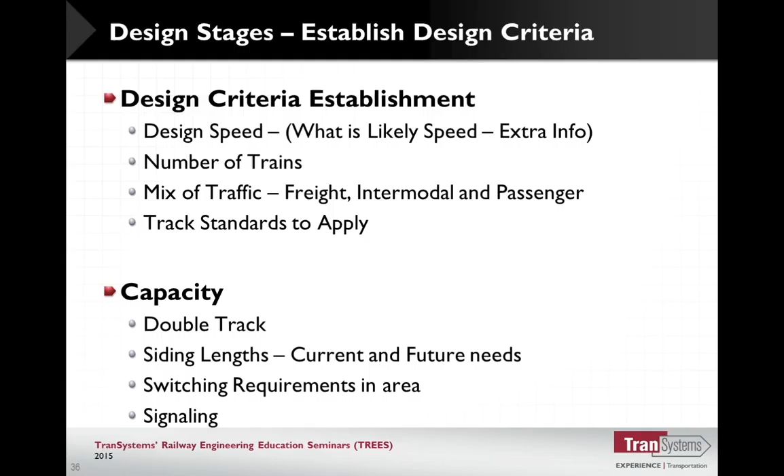Where we left off last week was talking about the main line. We've got a lot of the different issues itemized, some of the data we're going to collect, and we're going to talk about it a little bit -- how do we present some of the things to get to some of the decisions made? So we want to take it a little bit further this week regarding the main lines. How are we going to do our design? What are the things we're going to want to talk to the railroads about, and try to do it the best way?

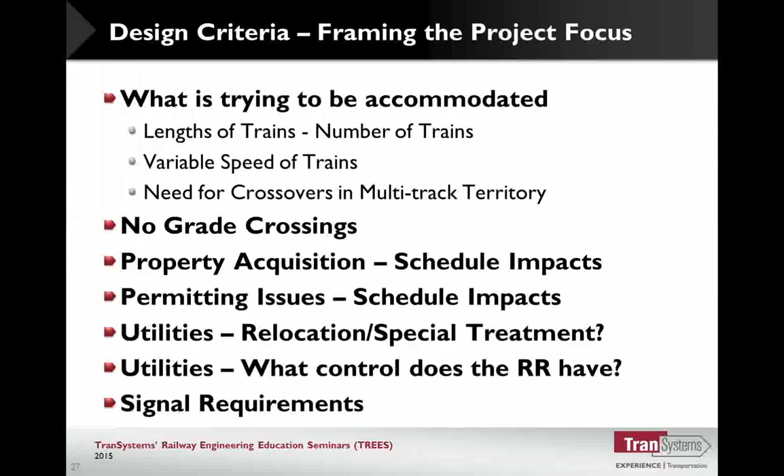The way I've been trying to push our guys is to look at and ask them intelligent questions, understanding the business, so you're not asking -- I kind of cringe sometimes, and so do the owners. A lot of times they're very polite, but I don't want to discourage questions -- just ask questions in ways that sound like you've done your homework. So do your homework, don't just be lazy and wait for the owner to give you all the answers, or let the project manager be the only guy who's going to provide you with the information. Be a little aggressive: okay, we want to do this or that, and ask the question, could we do it this way or that way? We kind of look at this one, but what do you prefer?

So when we come up with these things, I want everybody to be thinking in those terms. A lot of times there isn't a hard and fast answer on every project -- all projects aren't the same. A lot of times on intermodals people imply to me that one intermodal is the same as the other one, and it really isn't.

Everyone's got their own, a lot of the stuff is similar on the main line. I just, it's the main line, you're going to run 70 miles an hour on it, and it's all the same.

Well, that really isn't true, and we'll show some of the things you have to consider. Asking the right questions, and doing it in such a way that doesn't make it sound like you're unknowledgeable, versus asking a question that sounds like this guy's knowledgeable and he's just trying to help by getting the answer. I think we want to always try to be in that latter camp, because even as polite as the owners are, a lot of times they'll answer and think, 'I'm not sure this guy really knows what we're doing, or he seems to be asking too many questions.'

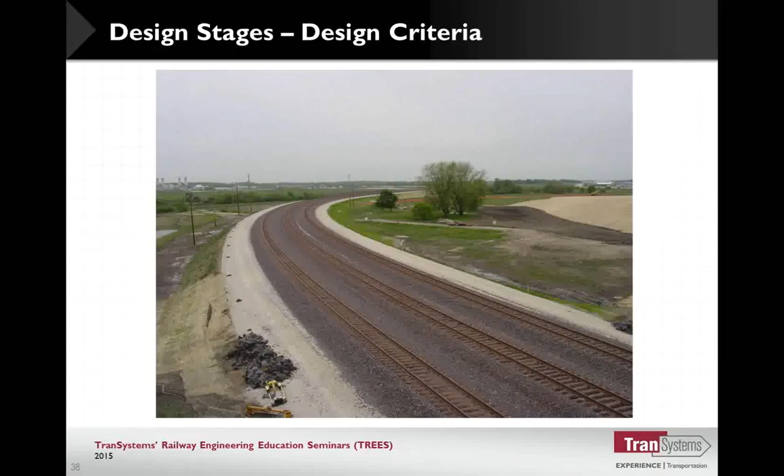That's establishing the overall design criteria, not worrying about that one simple task or specific task you have, but looking at the overall project.

Again, just kind of following up, on capacity projects we may want no grade crossings in this area, or what impacts the grade crossings may have, and what property acquisition is needed. A lot of times it would be a better alignment if you could buy a whole bunch of property, but depending on the situation it might take months or years to buy the property, or you might have to go into condemnation. All those things impact what you design, because the schedule for the property acquisition might be the ruling factor.

Or a permit issue - how does that impact the schedules? A lot of times it's very difficult on the railroad to avoid wetlands, because you just can't turn that fast. On roads or a building, you just put that on a different side parcel of the property and avoid the wetlands. But with a railroad, because it's limited on its curvature and ability to meander, you pretty much have to go through there.

So then you pick the area that's going to have the least impact. If you can get a nationwide permit, that's way better than doing an individual permit, which might take years. A nationwide permit could take weeks, or three months at the most.

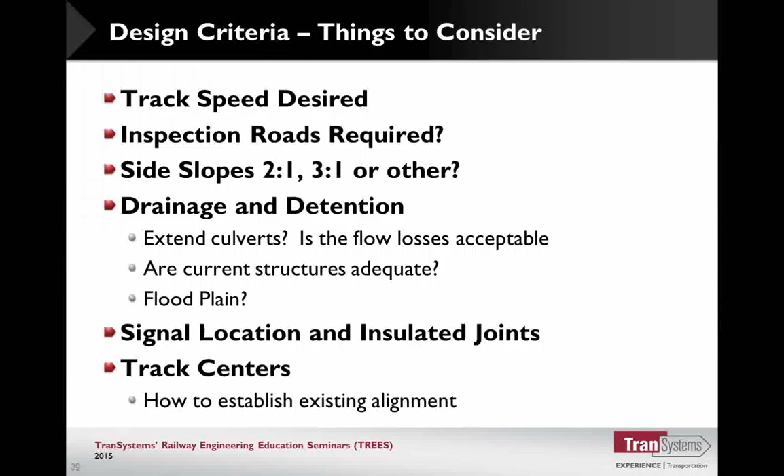We're going to take a look at a few design issues, trying to come up with whether we need access roads, for instance, and how we're going to get through an area. Here's an example—this happens to be a major lead, a 50-mile-an-hour lead into an intermodal terminal.

Some things to consider: what is the track speed? I think we've talked about this a lot, but one of the things you want is a full understanding, because at some point, to meet the schedule and what the railroad is asking, sometimes you have to bend the criteria. Sometimes it's just impossible to meet all the criteria, so you want a good understanding of what you're trying to do, so when something has to give, you know which parameter or criteria to modify.

That may not be the same in every case. There are a few criteria I consider the first ones to relax, while others are more hard and fast that you don't want to touch. You want to build up your case of what you tried, but to do that, what is the desired speed? They might say 50, but you might end up finding 30 was probably good enough.

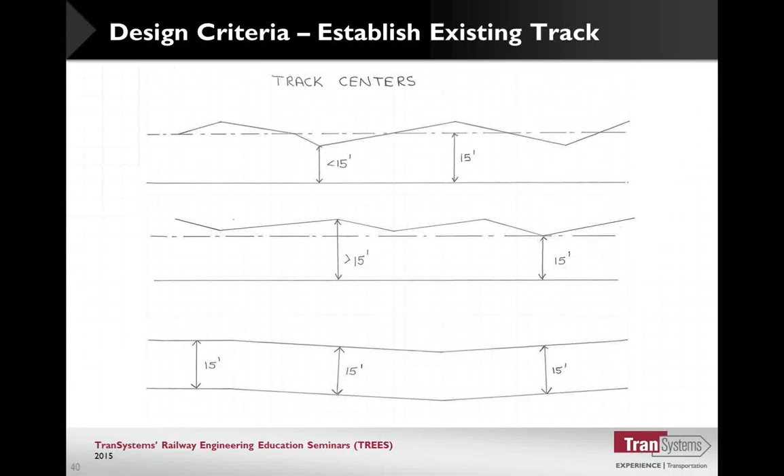If these things are inches, that's one thing. If they end up being 3 feet, you may have to evaluate it and come to one of these other solutions. But you want to do that, and that's one of the things I don't think you want to take lightly - try to understand what you're dealing with. You might have situations where for that best fit line, just like any other, you try to get that best fit - you maybe want to throw out those real bad alignment points, just so you get a little bit better best fit line.

Identifying capacity.

Out on the main line, you've got public crossings that you're dealing with, and depending on the state that you're working in, they may have different rules. Some want to have 250 - the train has to stop 250 feet from the crossing. So that's the point you're going to, regardless of where the clearance point is, the train can't go any closer than that distance to the crossing.

In Illinois, what we have is the law says 250 feet has to be clear, but the ICC, who has jurisdiction, tries to encourage the railroad to have 500 feet clear. So when they're looking at it, what is the real clearance of that siding? It's not the clearance from clearance point to clearance point, and in some cases it's not even the insulated joints of the signal on one end to the insulated joints of the signal on the other end. You have to identify where the crossings are. Where is the train actually going to stop? So what size of a train can you actually get into the siding?

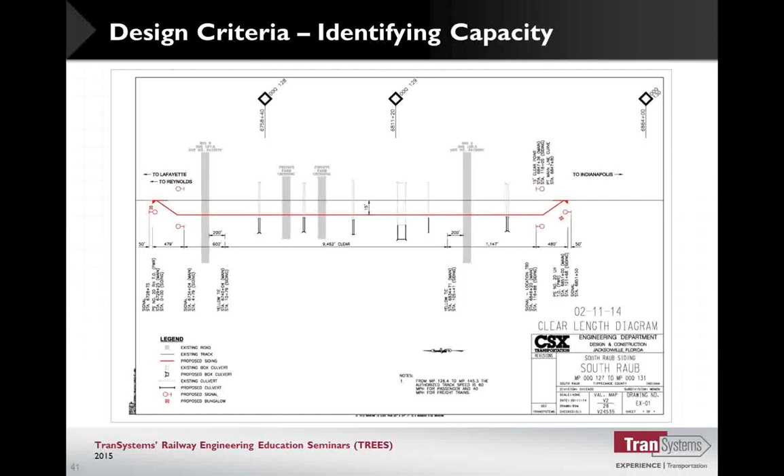So once we started coming down to it, you could do more, but you'd have to close one of these crossings to get more than 10,000 feet. But they were able to live with that clear length because of the operating conditions. So you start to balance all these things, and again, understanding what you're trying to do allowed you to make an educated determination of what you were going to recommend.

You want to identify what the capacity is required. What are the planned lengths of trains? Standard practice is we want all sidings 10,000 feet, but try to find out what they really need. Here's a standard, because a lot of times, like I mentioned, because of curves, because of crossings...

We had another one where they wanted 5,000 feet of tail room coming off an industry track. Well, if they had 4,500 it was fine. To get 5,000, they would have to build another bridge across a small creek. So, let me see, we want 5,000 but 4,500 will be fine. We don't want to build an extra bridge.

So you have to try to understand that. You go through it and provide them what they want, show them what those obstacles are, and then provide the economic justification. Maybe in the case that we had the bridge, 5,000 was the bare minimum. For whatever reason they had to have 5,000 and there wasn't any compromise, so building the $400,000 bridge wasn't really a problem.

Impacted grade crossing - can you get it relocated? Do you have to make it a grade separation? What are the options that you have? Can it be closed? Everybody's trying to close crossings except for the person that lives there. So what's the likelihood of getting that done?

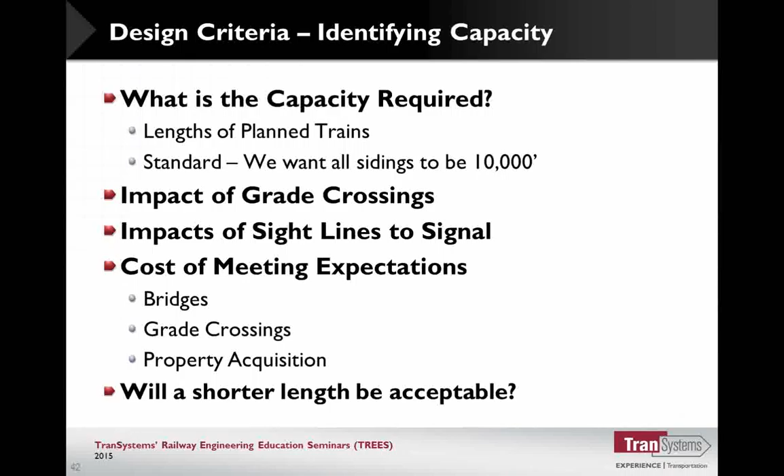What are the sight lines to the signal? You can't - it'd be nice to put it in one location, but you can't see it from there because of a curve or some other obstruction, so you can't put the signal where you wanted to have it. That might impact the cost of grade crossing, property acquisition to get what you need. All these things may lead you to the determination that a shorter length might be acceptable.

What are the security concerns? This happens to be in an urban area. We talked a little bit about that last time, but are you going to need something to secure the right-of-way? The railroads are very high on security. There's a lot of places you can drive right in. In most urban areas, they don't want the general public or rail fans or whoever doing mischief around their tracks. So try to come up with a way to secure access to the right-of-way.

How are you going to handle the off-site drainage? We're going to show some pictures here, but the normal flow of the water all came across this and went right through here and down this way across the right-of-way. It don't look that way here, but we're right in here. We ended up being about a 40-foot cut. We're about 10, 12-foot cut or a little more here.

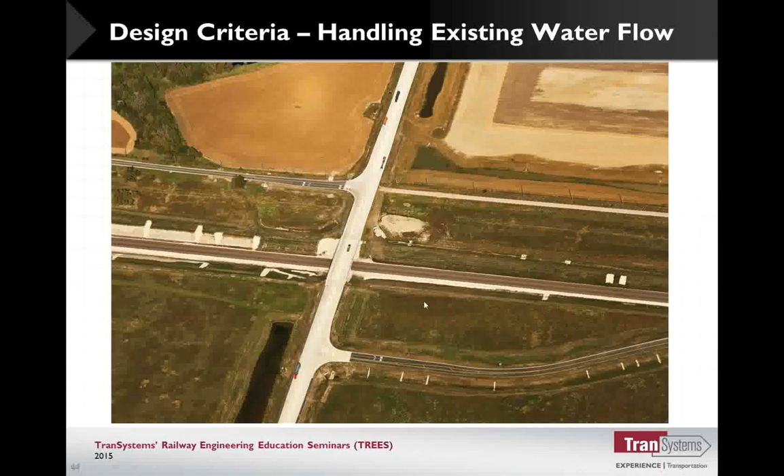That one area, just looking in the back, this area here - another one of those things where there's a lot of different ways we could have handled that water, but they weren't going to. The developer chose not to buy that, so they had to drain that water away some way. So the natural flow was this way, and it had to go down on the railroad. So they took that down and riprapped it down into their existing system.

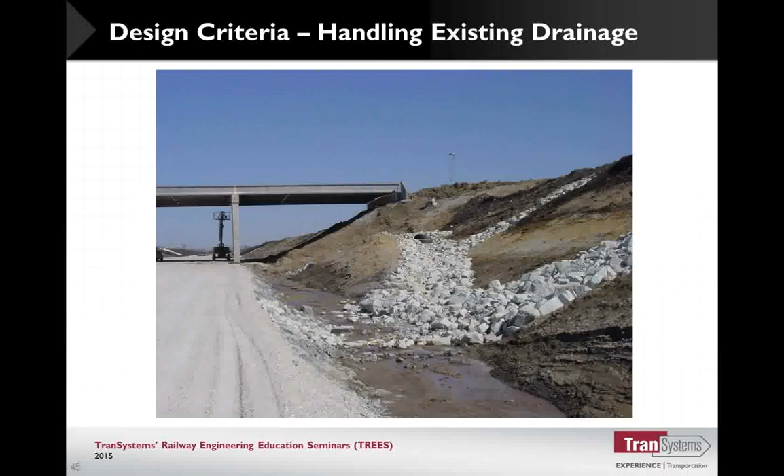But being able to address that, what are the ramifications? How are you going to deal with that situation is extremely important, and try to identify those problems early. We had under drains and stuff coming out of the adjacent land. They were picked up and brought down to the railroad track ditch.

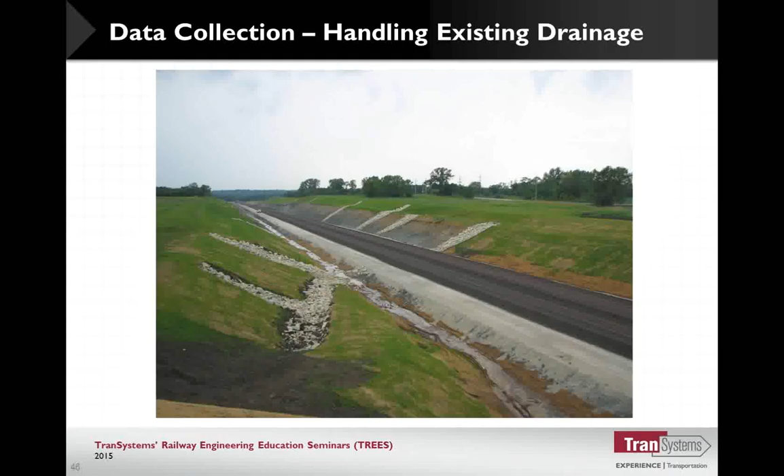We're down in the bottom. We were in a floodplain, so we had to have some compensatory storage, and there was another culvert going underneath an adjacent railroad. We had to figure out how to handle the water there, because we didn't want to spend the time going to the other competitor railroad and asking if we could put in a couple big culverts underneath their railroad. So we came up with a solution to detain the water and then allow it to flow out in a controlled manner that the existing culvert could maintain.

The whole point here again is trying to understand these things early on. If these are things you stumble on after you start getting down into construction mode, obviously that's going to cause you some grief. So you want to try to look at what your options are.

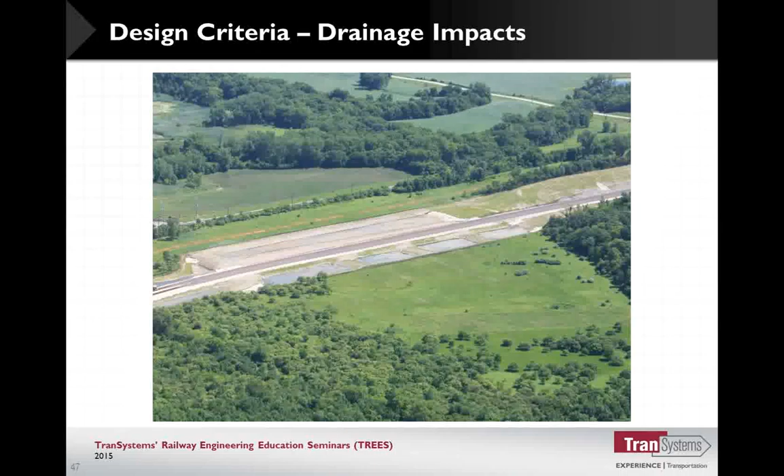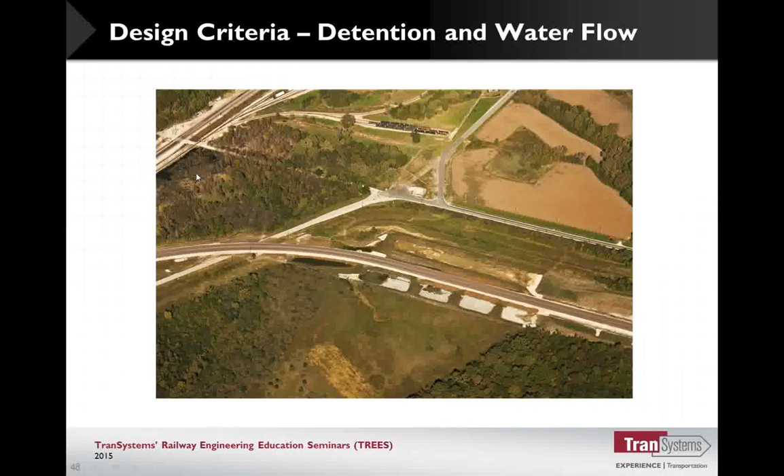So if you have a pond and you have to buy extra property, it wasn't beneficial to buy it up here in this big cut. You bought it down in the bottom where it was a little flatter, something you could actually do, so you balance the impact. Find out that the water actually flowed through there and came across and went underneath the other railroad on the other side over here.

Here's a situation where this is a road crossing. How are these tracks going to cross that? The decision was made that it made the best sense for everybody that this road be closed, and then that bridge was built that you've seen on the previous slide.

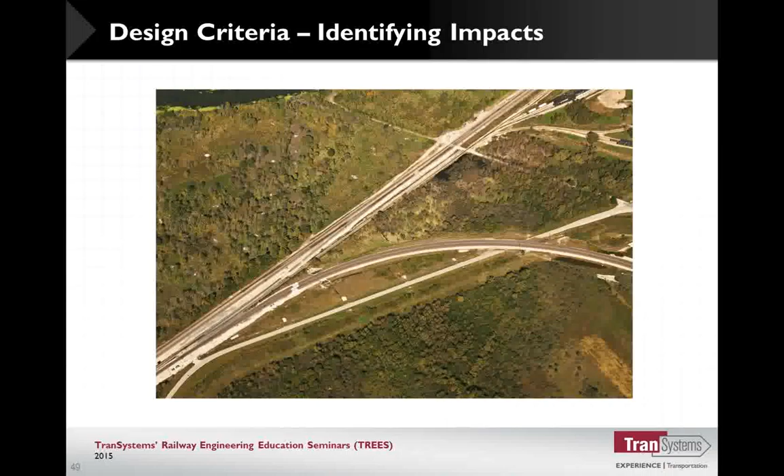So everybody kind of won. The railroad didn't have to worry about that grade crossing and the safety ramifications, and the public was always going to have a clear, open path to wherever they're trying to go, instead of potentially being blocked by a train.

Again, early coordination with the signals. We mentioned this a lot. We're going to take a look at some sketches again. What are the sight distances? Signal locations. Making sure that you have enough room for that.

Are you along a retaining wall? There really isn't any place, so you have to add that to a retaining wall. Work with the signal guys. What are the ramifications of moving? It's surprising that moving a signal sometimes just 300 feet is really detrimental to one thing or another, and it seems like it should be easy to just move that signal up there, but you don't have your stopping distance.

Again, on the railroad, a lot of things don't happen - decisions aren't made by what happens at a specific location. A lot of times it happens, like we pointed out, miles away, sometimes even tens of miles away.

You want to identify where you're going to put the signals so you can see that you have enough room. If you don't have room to put signals in between the tracks, you might end up having to have a signal bridge, or providing enough clearance so you can put a wayside signal in between the tracks.

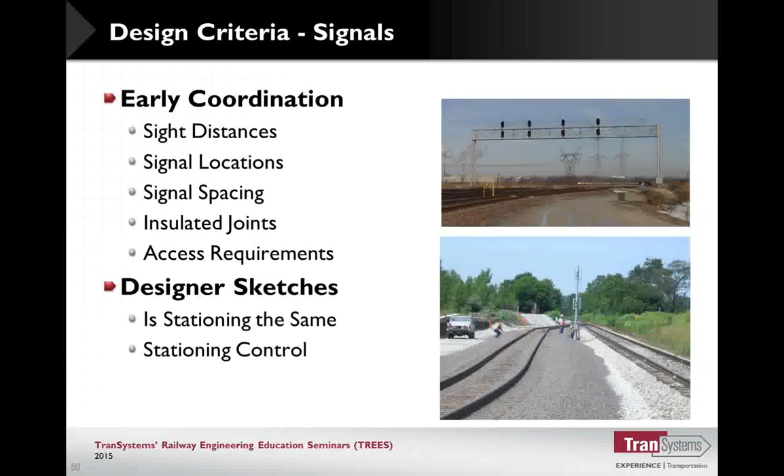Back here, just on the stationing control, you want to identify - that's another important thing - identifying and using the val map, so you know what railroad station is being used, so you put stuff in the right location. The signal guys' plans generally follow the track station as well. So you don't want to use arbitrary, local stationing. You want to be able to tie that to the railroad stationing from the val map, because generally everything else is set up that way.

You're going to get these early designer sketches to identify - you've got a bridge here where the signals are going to be placed, so you know what station that is. Does that lend you a problem? They'll usually tell you, an 8x6 or an 8x10, or a 10 by 20 foot bungalow, hut, whatever they refer to it as. Where's the information, or what are they going to need, and where and how far out?

Usually, if you're going to put in a new control point for your switch, they're going to have to do something - in this case they're saying so they understand for the grade crossing. There's a grade crossing here. On another one, there's going to be another block signal out here somewhere. Is that in our project? Who's going to take care of the grading for that?

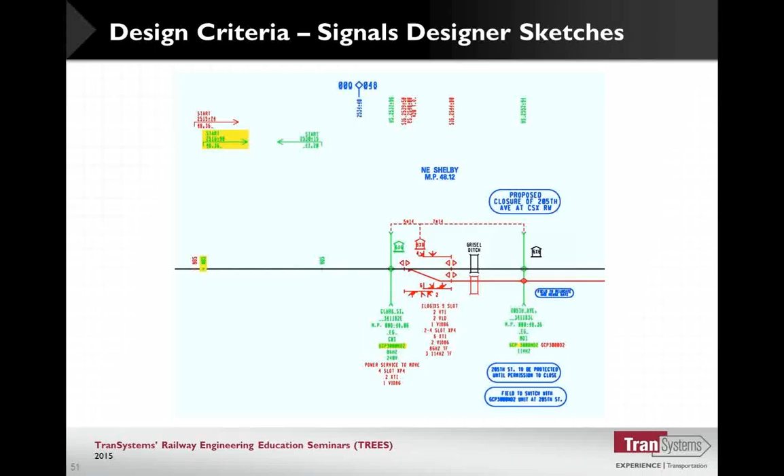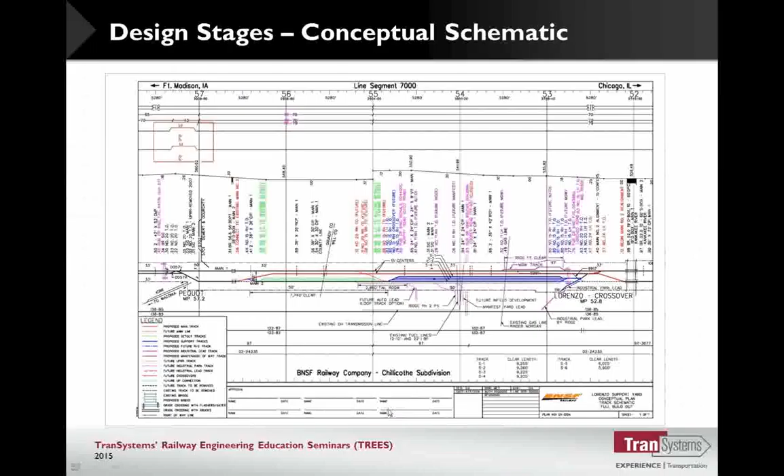In this case, what you're signing off is a sign-off schematic, so all the right people that need to approve the plan fully understand it. There's a lot of things they've added, what is actually happening, a little bit more than they normally put on these. But find out each individual railroad's preferences - you've seen a couple examples, some of them you develop and they want different stuff on it. You want to understand what the railroad wants and needs for the powers that be to actually sign off and approve the project.

This was an early one we built at one location. The main lines were 83 feet apart. We started adding a whole bunch of stuff in there - as you can see, when we added a new connection, this was that connection where we were looking at the aerials and the drainage issues. The railroad wanted to know between all these signals - now I got basically three main tracks because this siding was a controlled siding, signalized for 30 miles an hour. The main lines were 70, but they occasionally would want to park a train out in the main line. They wanted to know what it was, with all the crossovers and stuff, whether they could still operate and get around it. They want to have that flexibility, so the use of schematics is generally great for that.

The operating guys have a hard time, for instance, reading design plans. But when we get them schematics, they can get it. I want a train from here, and I want to be able to get over here - what do I have to do, what do I have to go around, and can I get the right signal indication to accomplish that? They can usually follow schematics fairly well - they just don't blow up.

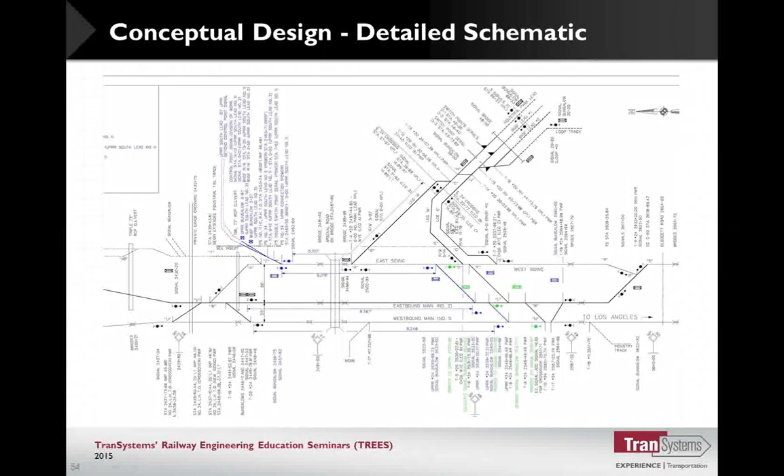You start putting in some of the details you have - what's the clearance between the signals? This is a case where they're going to want the trains to stop. They wanted to know what the distance was between signals. We'll deal with what length of train can fit in there, because technically they could put a 9,248 foot train between the two signals - that's not what they want. Depending on what railroad it is, they're going to want the train to stop behind that signal for safety, to make sure they don't go across the insulated joint. But it clearly identifies what routes are available, where signal bridges are, how far it is to different things, so the operating guys can understand what's happening, and it makes it real clear for them.

We're going to want to do the preliminary sketches. Here's a situation with two existing mains - they're going to build a new main up here. One of the things, this section works real good here, but one main is at a different elevation. Is this low point, what really happened? In this case, the two mains were at one time different railroads, they're 83 feet apart, as you can see, and one's higher, one's lower, depending on, in this 5 miles. So this is a good typical section, and it works real good.

It almost makes sense—it's got the low point out here where you have the widest gap. You can put an underdrain in, or you've got your sewer over here. But the reality is that sometimes this one went down below, so this thing didn't always work quite that simply.

You want to identify that early on so you know the ramifications. This one's going a lot farther at 2%. If these are at the same elevation, this one works so good because you're going 11 feet at 2%, and now you're going 45 or something, so you've got a lot lower. That didn't really happen that way.

So you have to understand what those are, and drawing typical sections to scale, trying to address the issues that you have as you're drawing that. A lot of times, did I take that into account? What ramifications?

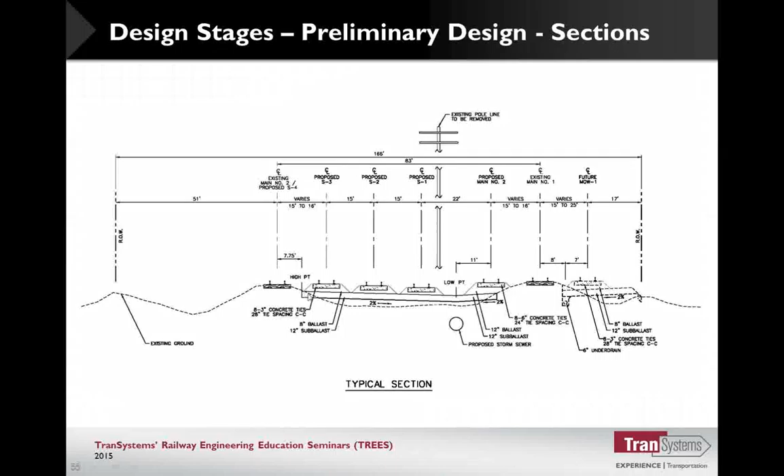So there's a case where you might come back. This is really what you want to have happen, but what you might have to do is come down to here, be a low point, and then come back up. Whatever it is to come up, you might even have to have some drainage over here because you're coming down to here, you have to come up to here, and then back down to that one, so you're only going the same distance or whatever.

So you want to take all those things into account, and typical sections are the best way—if you don't do anything, nobody can see it. The people actually doing the design are the ones that really have to catch that stuff, because the contours are hard to read on a railroad.

Cross sections, once they get fully developed, you can see that stuff if you're paying attention. But early on, you're the one seeing the survey information and don't know what you are going to get.

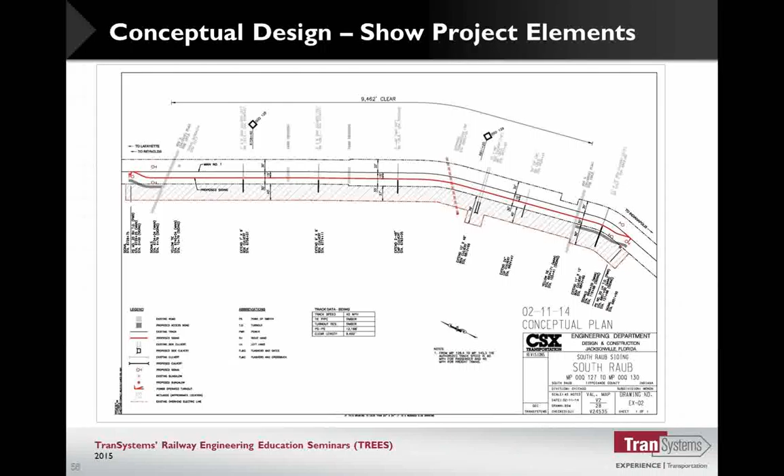Showing the project elements, you want to show all the elements—what areas you're going to acquire property for, so everybody can have one exact drawing where they can see as much as they can about what's happening.

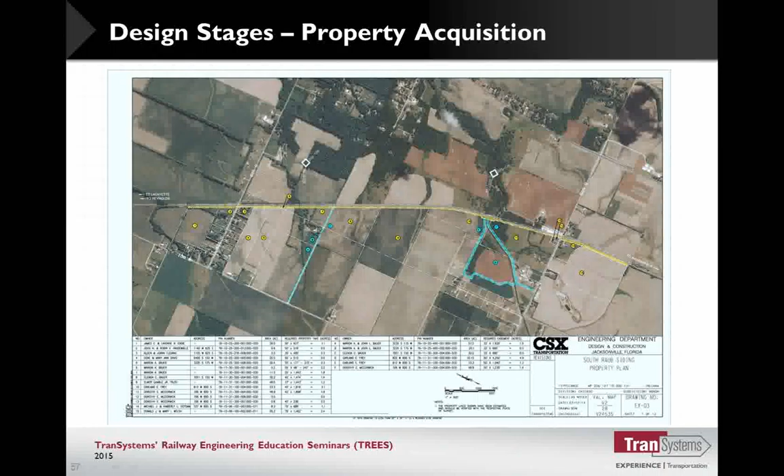Property acquisition: try to identify the property owners so everybody can make the decisions they need to make. Try to do it in a clear manner. Follow up something like this with little blow-ups of what you're asking for in each one, so the property guys understand what they need to acquire.

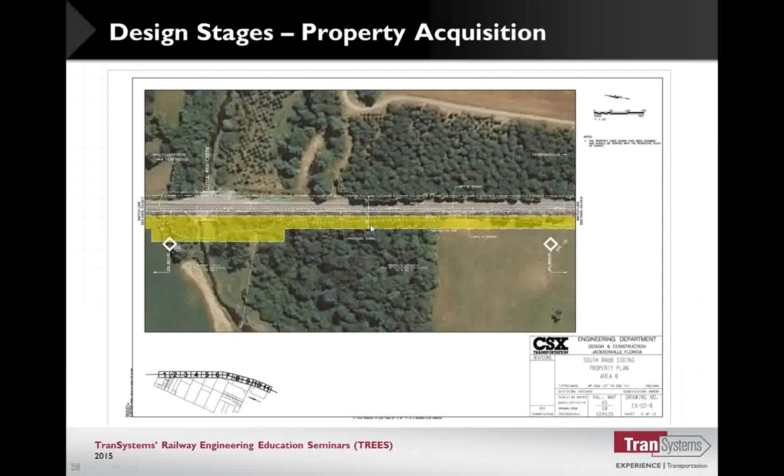There's a little more detail so you can see there's a cut-fill line, so you understand why it's out where it is. Sometimes they want to keep it as some uniform thing. If there are two property owners, this guy might be easier to buy from, or harder to buy from, so you might want to squeeze that down. But a drawing like this makes it really easy for them to identify.

Here's a situation where the standard track ditch on the side would make sense, except we're cutting into this guy's property—we have to buy the property, and not only that, we have to start cutting some of his trees, even though they're not really his trees. He planted them on the railroad right-of-way, so he has no real right to them, but they blocked the railroad from his property, and he wanted to keep them there. So he identified it.

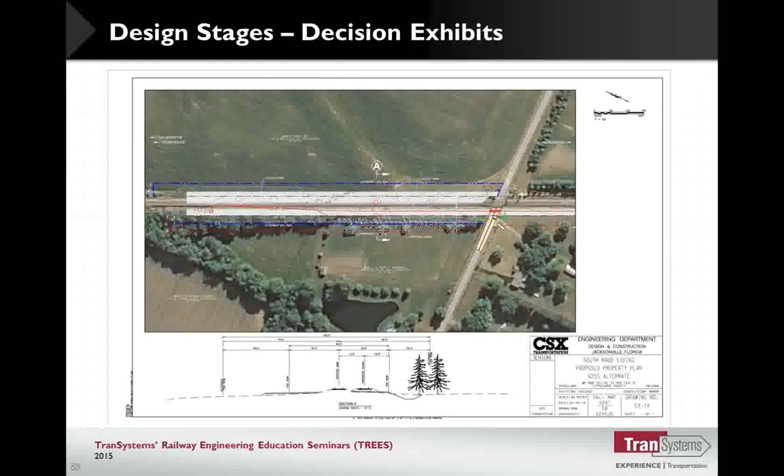He identified what the issues were, so what are the ramifications of moving the ditch over to the other side? Over there, you'd end up having to buy more property. So those are the ramifications, but if you give a clear exhibit, they can make those decisions.

Here was a situation where you had that big long curve with the switch—you had to wait until you got around the curve to put the turnout in tangent track. They didn't want to come back, so you ended up with the track actually a little bit further out.

You wanted 15-foot track centers, but you didn't want to come back tangent and then follow the curve around, because that puts more curves in there. But when you do this, you understand how much you're going to have to extend this culvert. You find that if you need a signal bridge right here, you're near the culvert because that's where you needed it to be, so you're going to have to do something on the other side. This way, everybody can understand—I've got plenty of right-of-way, that shouldn't be a problem.

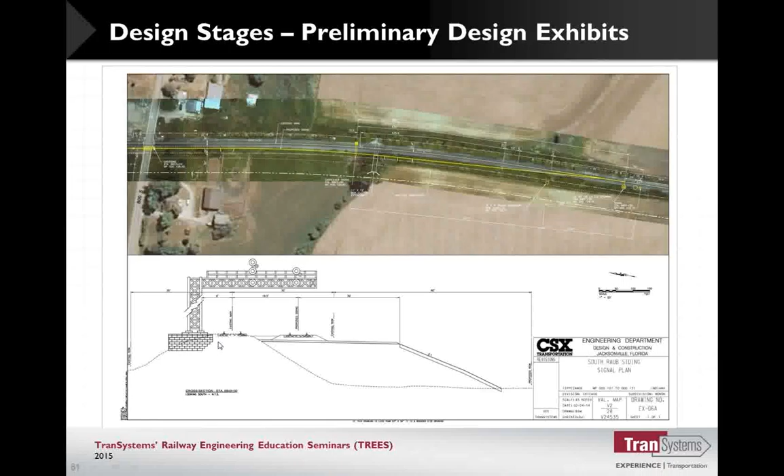If there's a big fill, that becomes a problem. If it's a nice, flat area, not so much. But you're trying to identify all the issues that you have.

Making sure that we understand the CAD standards, all the typical text size stuff. The railroads are very particular about what's used. On larger projects, you want to select a CAD manager, somebody to try to keep everybody doing the same thing, because we all have different preferences, making sure our naming conventions make it as easy as possible to work with each other.

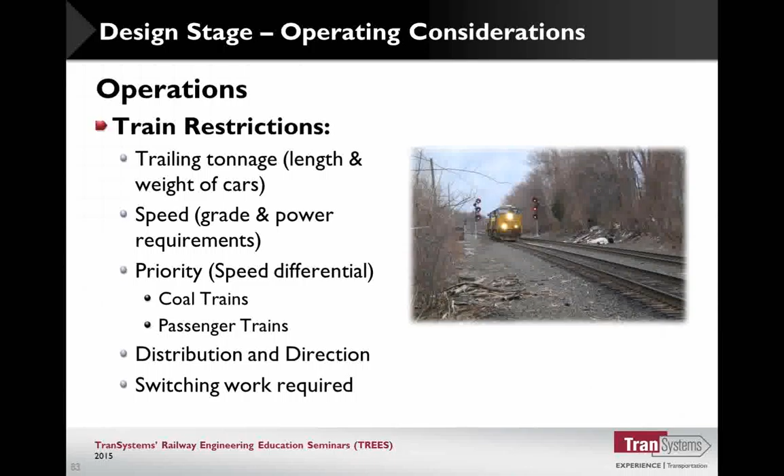Operating considerations, train restrictions. I think we've talked a lot about this in the past, so I'll kind of breeze through this. The grade, how much tonnage, what's the ruling grade. Keep in mind the speed of the whole train, so when you have slower things, the whole train has to get over it, so the train will be tied to that restriction for 1.5 miles or whatever.

What are the switching considerations, making sure you're not putting turnouts on a steep grade to where if the train has to stop to get into the siding because it's a manual switch, how is he going to stop at that if he's on a steep grade and can't throw the switch? So understanding your situation is important.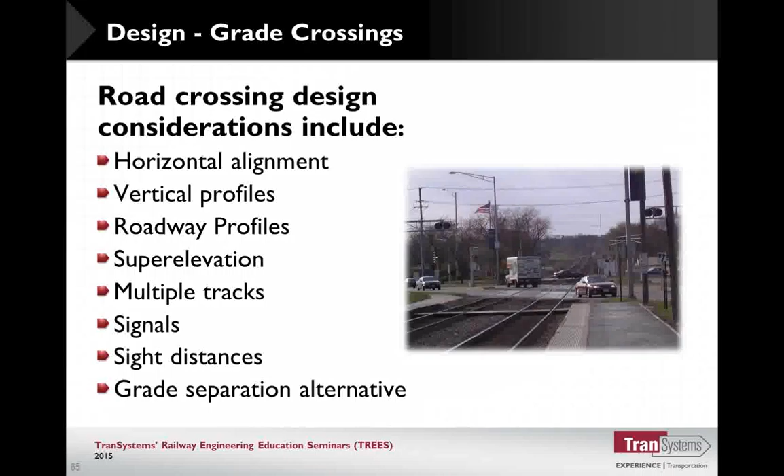Grade crossings. We have a section coming up on grade crossings, so I'll be brief here, but when you get multiple tracks and super elevation, you want to understand what's actually happening. If the track is flat and the road is flat, everything works out good. But if the road's on a grade and the track's on a curve, you've got super elevation in there, and trying to get a smooth crossing is extremely difficult. That's one of the reasons you want to try to locate your turnouts or crossings on tangent track, so you don't have the super elevation issue.

Worry about sight distances. Most public crossings nowadays are going to get gates and flashers, I think, as a general rule. Some of the lower volume ones we've done have less than 500 vehicles a day and are getting gates and flashers. The ruling grade, we talked about that before, but that's extremely important when you're coming up. Don't add extra grades in there. Be careful what you're adding, especially if they're for any distance.

I'm going to take a quick look in the last minutes to talk about super elevation and curves and how we're doing that. One of the things that separates the highway from the railroad is that, as a general rule, certainly on main line, you're going to add spirals to all your curves, at the ends of curves and in between compound curves. A lot of times you want to provide enough length for possible future changes. If the track is going to be 40 miles an hour, but in the next 10 years they might start running 70 on some new alignment, you may want to make the spirals long enough to accommodate that higher speed, and just not put that much elevation in initially. So you want to understand what the overall project is and what the future might bring.

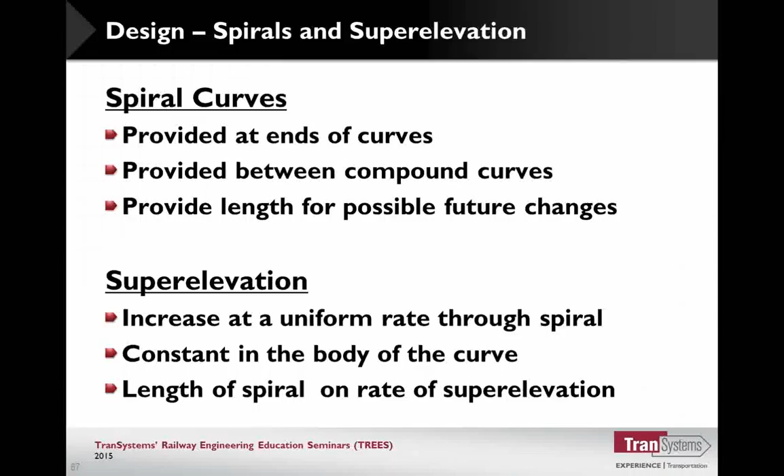Super elevation is the difference between the inside rail and the outside rail. We'll look in more detail here in a minute. You're going to increase it at a uniform rate through the spirals, and it's going to be constant through the curve. It should be zero in the tangent. So for a 2-degree curve, you'll go from 0 to 2 inches through the spiral, evenly spreading that 2 inches over the entire length of the spiral, and then during the body of the curve, stay at 2 inches until you get to the other spiral.

I don't want to rush through this too quick. I don't know how many of you have looked at super elevation. It's a pretty simple concept, but it has multiple parts, and for some reason we all seem to have a little trouble with it. But anyway, let's start with equilibrium elevation. Equilibrium elevation is where, basically, if you're going at a given speed around the curve, you don't feel like you're tilting very much - you just feel the centrifugal forces and everything balanced. I won't get into all the physics there because I don't know it, and I don't really care. The point is that in that situation, that's the optimum. If all the trains are going 60 miles an hour around that curve, everything is nice and comfortable at some specific equilibrium elevation.

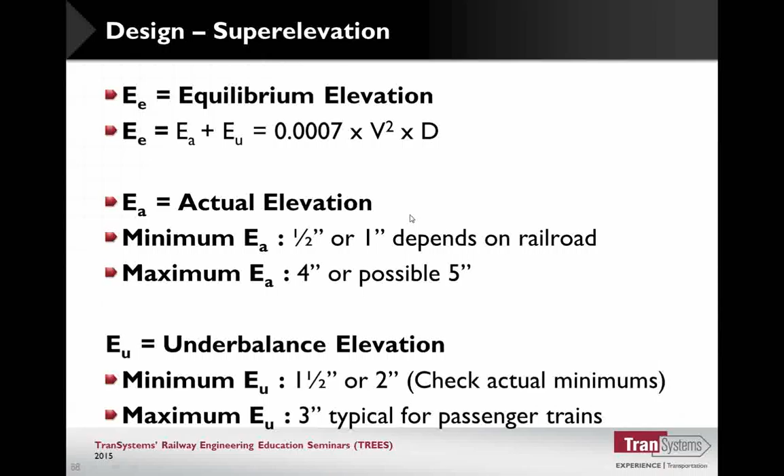For a comfortable ride, the other purpose is that freight trains are going to go through that curve real slow, while the passenger trains and some of the intermodal trains are going to go through there pretty fast. So sometimes the curves you're going to have to balance, and that's one of the ways you tell the difference - what's the maximum speed here that you can give for a given elevation. It'll be different - if you have 1.5, it'll go through it slower than at 3, based on the equation up here.

Just trying to identify this, and we're going to end here with a couple of quick examples. You want superelevation - a lot of times you want to balance the two. That's another way of doing that when you're at the lower end. Use the maximum, minimum, just discuss.

For the length of the spiral, there's a couple of equations in AREMA, and each railroad has their own, but I usually try to use the ones in AREMA just to check and get an understanding of what each railroad's things does. So if I have to vary from that, why do I have to vary it, and am I still within the realm of reasonableness?

On the length of spiral, using the unbalance, one of the things you can see is just a direct correlation - 1.63 times the unbalance times the speed. That's what they do on new construction, trying to minimize the length of the spiral. On existing conditions, they might use this, but you can see that one of the things that happens is if you've got a passenger train with 3 inches of unbalance going 70 miles an hour, that ends up being a pretty long spiral.

If you got 1 inch trying to go through at the same speed, the length of spiral that you need will be a lot less. The equation for the actual super elevation is 62 times the actual elevation. So if you have 1 inch of actual elevation, you need the spiral length to be 62 feet long.

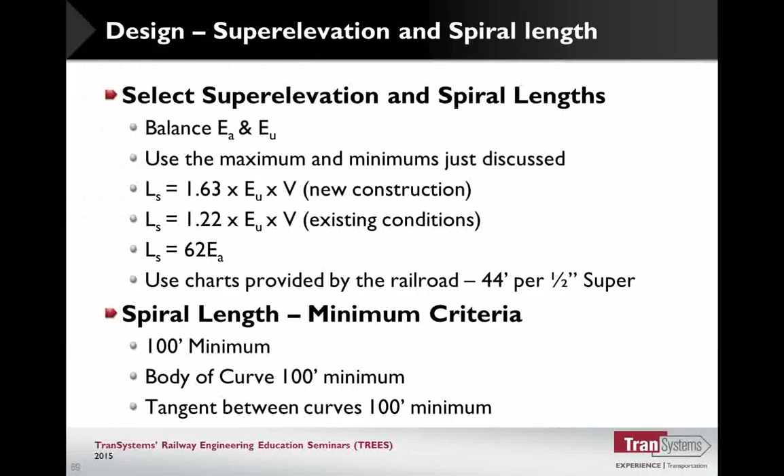Keeping in mind that rule of thumb, if you got a 200 foot spiral, generally that means 100 foot is inside - if you had just a simple curve between the two lines, you'd have 50 or 100 feet, half of it inside and outside of the curve. So you get some idea of, if you make the spiral longer, what impact you're going to have on the tangent, the body of the curve, and the spiral length. You can do some comparisons to get you into a ballpark.

Just as an example, let's try to go through that. If we have a speed of 40 miles an hour, and the degree of curve that we're in is 2.5 degrees, we use the equilibrium speed equation from before: 0.0007 times the speed squared, 40 miles an hour, times 2.5, which gives us our equilibrium elevation of 2.8 inches.

We know that the equilibrium elevation is equal to actual plus the unbalanced elevation. So we got 2.8, and for freight railroads, they might want as a general rule 2 inches of unbalance. So you do that, you end up with 0.8 inches, which is pretty close to 3/4 of an inch. But the railroad might use judgment - sometimes they only do it in half-inch increments, sometimes they'll allow quarter-inch. It depends on the railroad, but in this case you'd usually go up to the next one, above 3/4. So the next logical increment in quarter-inch or half-inch would be 1 inch.

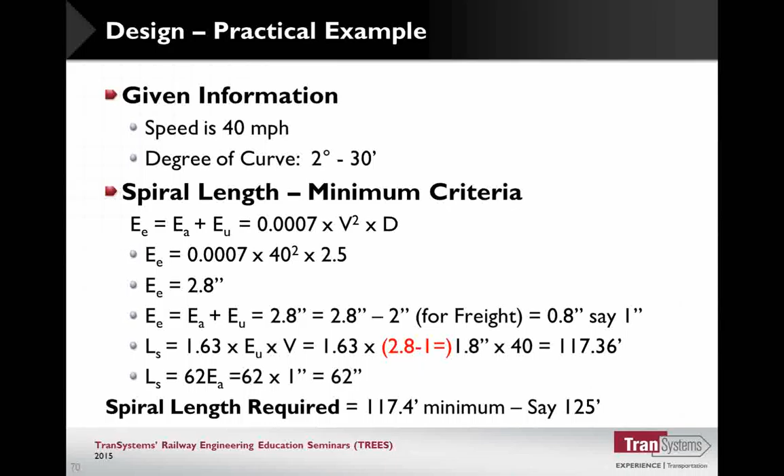Now you want to look at the circular curve - was that over 100? Was the tangent between the two reverse curves? If that was the case, you want to have that a minimum of 100, or whatever the minimum was that you were using.

Here's another one using a CSX chart. Same problem, let's jump back here. Some of the things we've got are a 40 mile an hour curve.

2.5 is the degree of curve, so where they intersect the CSX, they're going to say not 1 inch, not 2 inches, but they want 1.5 inch, and they got 1.5 inches of unbalance for speeds up to and including 60 miles an hour. So if we're under 60 miles an hour, we're going to want 1.5 inches. So they come up with what they want, 1.25.

The other criteria that they had for minimum spiral length is up to 50 miles an hour. They want 44 feet for every half inch of elevation.

Back to our equation. So the actual from the table was 1.25. The equilibrium was still 2.8, that didn't change any. But just checking with our equation, we had 1.5 and came up with 1.3.

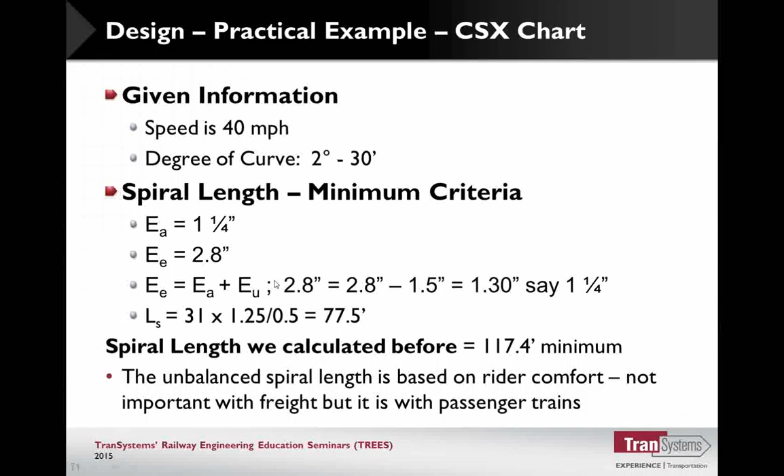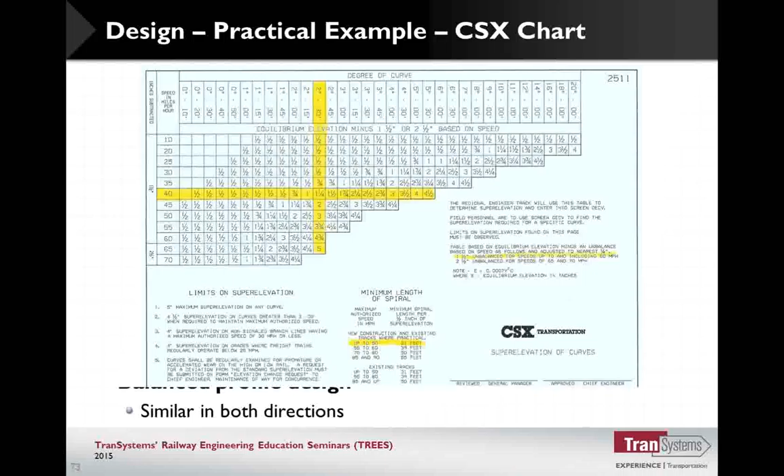So if this area doesn't have any passenger trains, or even if it does, the CSX in this case has decided that we don't need to have that one. I usually try to do that calculation so I'm aware of what their criteria is, so I understand a little bit that it's different. Why is it different? I can make those evaluations. So if we need to make some adjustments, or if they want us to do something special, we can make those corrections.

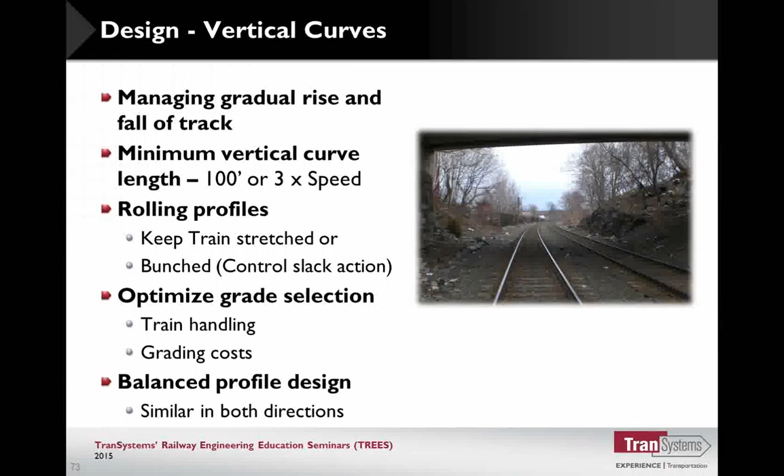Vertical curves - I won't go into that in real great detail. We've looked at that a little bit before, but the minimal vertical curve length is 100 feet or 3 times the speed.

You want to optimize grade. You're not going up and down - you want constant grades as best you can. You want to balance the profile design. Coming and going, the train has to go in each direction, so you want to minimize it. If you can avoid it, you don't want steep grades going in one direction and the opposite in the other direction, so westbound trains can get by with less power - you have to put more locomotives on going east. So if you avoid that kind of thing, you want to make sure that you take that into account.

I think this is the last thing, so we'll end up here. There are a couple of different versions - the old version of doing vertical curves is that you did the difference between the different grades divided by the length of the vertical curve in stations. So if it's a 200-foot vertical, the length there would be 2, and what you're looking for is a 0.05 rate of change for sags and 0.1 for crests. What you end up with is extremely long vertical curves to meet those criteria.

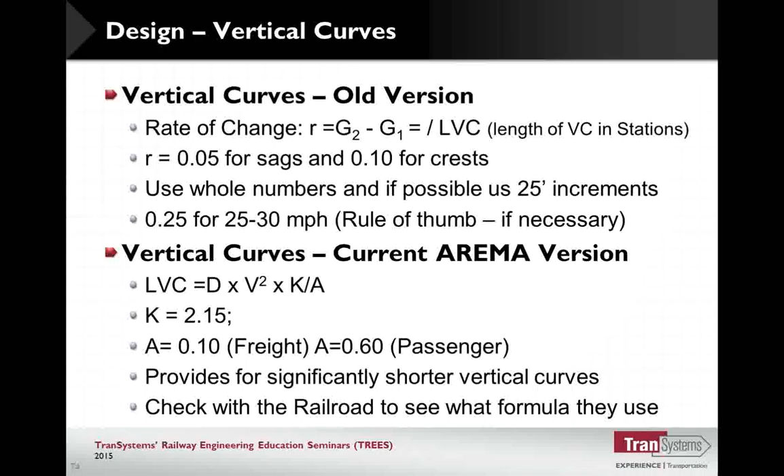It's little subtle things that nobody can quite put their finger on. So when you change it, it starts impacting what you're actually trying to do, without knowing it. So it was a struggle to get this, and eventually the railroads adopted this with that A factor, and that's the compromise they made to try to get that shorter.

So if there are any questions, there's a couple of items there worth going into more detail. The super elevation, for instance, is relatively simple and straightforward. It seems like it, but you can get a lot of different answers if you try to optimize it. What's the balance between the unbalanced and the actual, and what's most optimal for the length of spiral you're going to use with the length of curve you have to fit in the situation. A lot of times, especially in urban areas, we're asked to violate that, and having a good understanding of what you can and can't do there is important, instead of just following the rules or their chart.

A lot of times, in this case we were showing CSX - if you can't meet the CSX standard, and if you're working for CSX, you want to follow that one. If you're working for BNSF, you want to use theirs. UP, you want to use theirs, and NS the same. But if you can't meet that, one option is to use one of the other railroads' standards. Even though UP doesn't want to use the CSX standard, it's a legitimate standard, and you can cite that to help justify your argument.